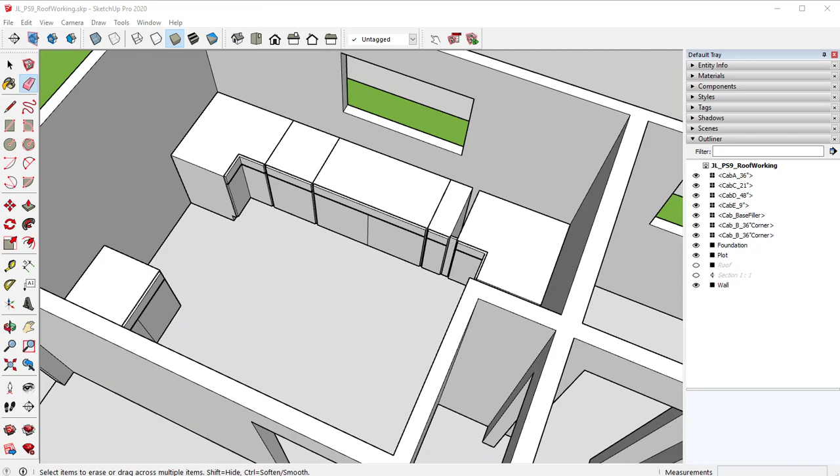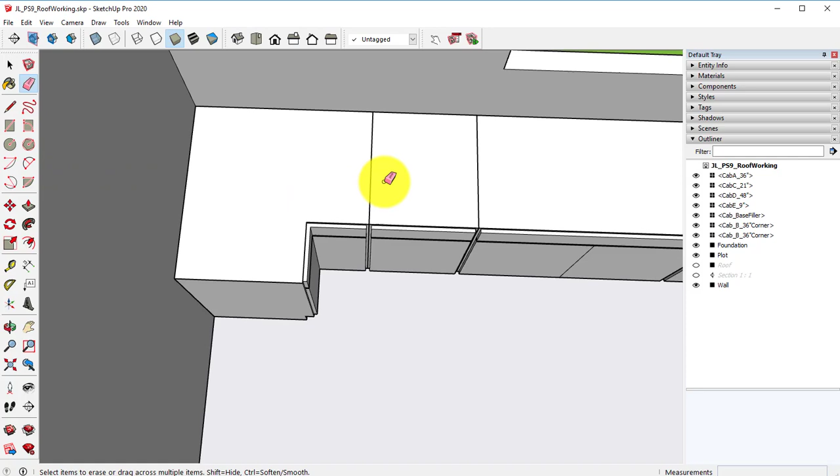So if we come over here to the right, this is going to be flush. So let's create our rectangles. Going to erase my line, so now I have one single piece. Take my push-pull tool, and we're going to pull this up 1.5 inches.

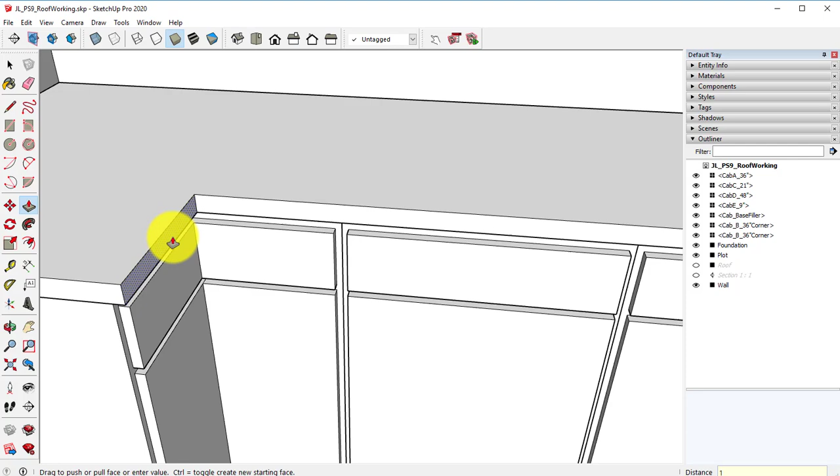We do have a slight overhang of 1 inch, so I'm going to take each one of these sections and pull it out 1 inch. And we'll go to this other side over here and do the same thing. We do not want to do it for this piece or this piece over here, as that's where the stove and the refrigerator is going to go.

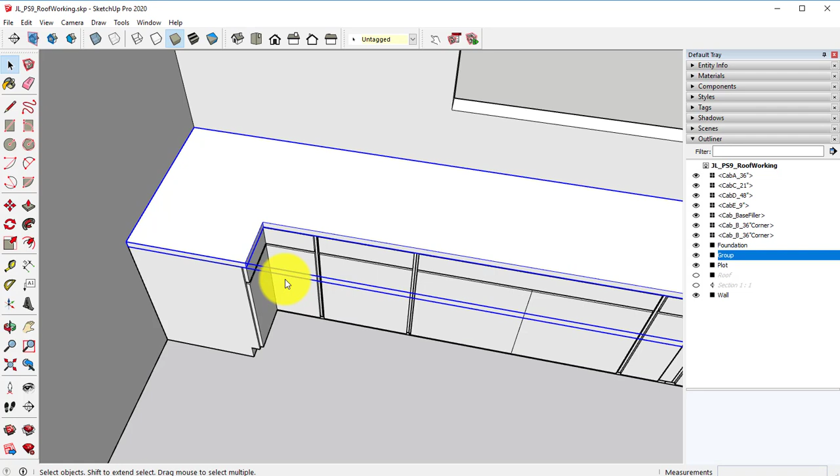Take our selection tool. We're going to triple click on this, right click. I'm going to go ahead and make it a component or a group. Either one is fine. And we're going to name it K counter A, because we will have a few different countertops.

We'll have this countertop, we're going to have the countertop over here, and then we'll have a countertop over in the bathroom. While I'm also over here, in your outliner panel, click on the very top one, hold down shift, and click on the last cabinet, right click on it, and make that a group.

And I'm going to name this kitchen base cabinets.

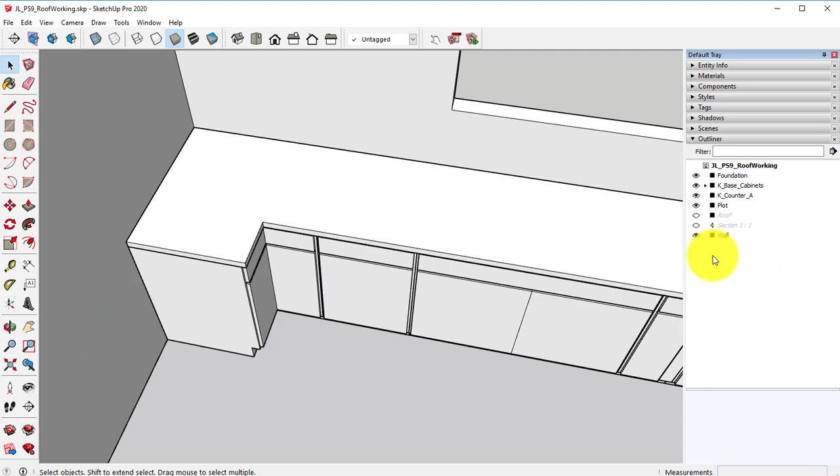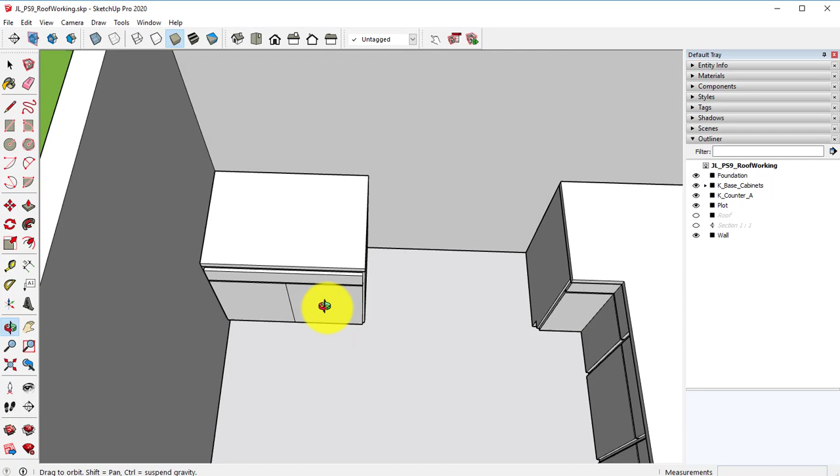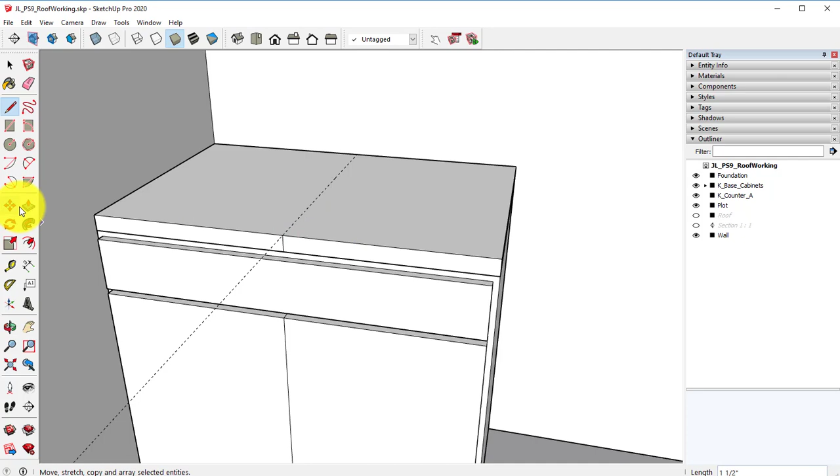Over here, we're going to have another countertop, the size of this one. I'm going to go ahead and pull this one up 1.5 inches. I'm then going to take my tape measure, and I want to measure out 18 inches. Hit the L key or the line tool. Let's draw a line straight down, make sure it's blue. We're then going to take our push-pull tool, and we're going to pull this part out 4 foot 6 inches.

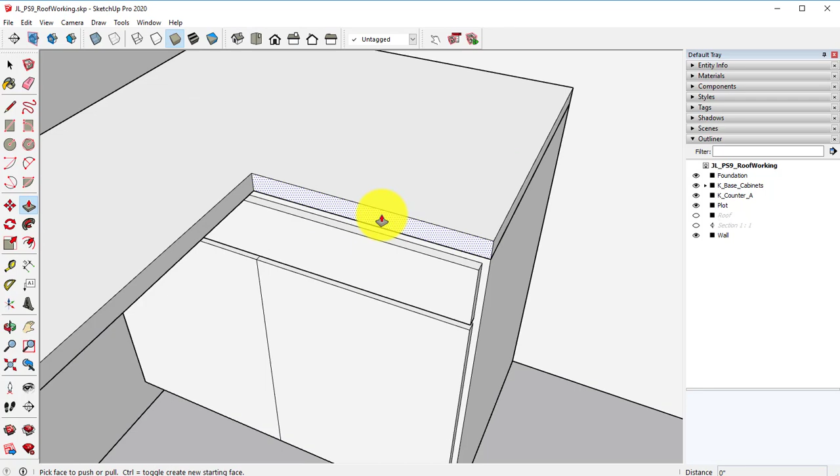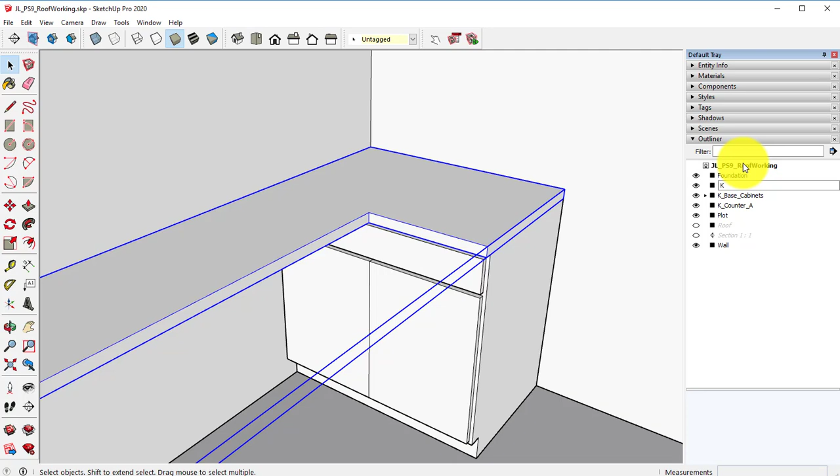Take your push-pull tool again. We're going to pull this right side out 1 inch to create our 1 inch overhang. Take your selection tool, triple click on it, make sure that everything is selected, right click, make it a group. Come over here to the Outliner panel, double click on that group, and we're going to name this one kitchen counter B.

If you ever get lost, like in the walls and all that stuff, over here in your tool panel, you can click on zoom extents, and that will zoom out.

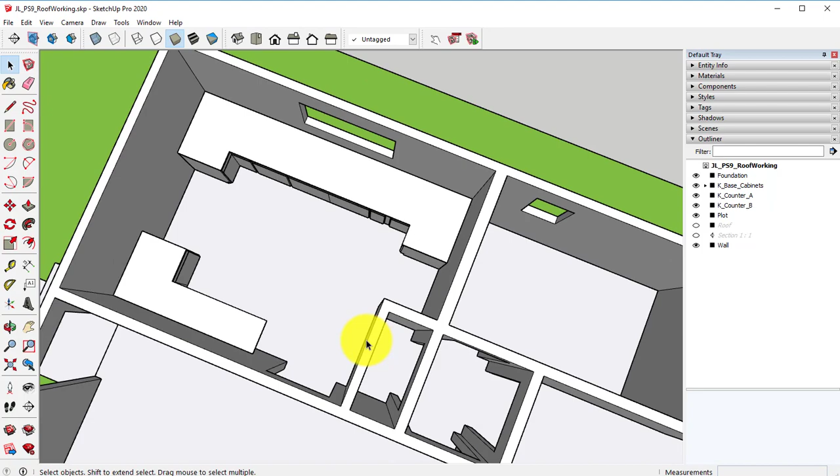So now we have our kitchen base counters. We'll add in our little legs here later on. We're going to start working on our upper cabinets now, and again, just like previously, I'm going to work on the corners, and then we'll go from there.

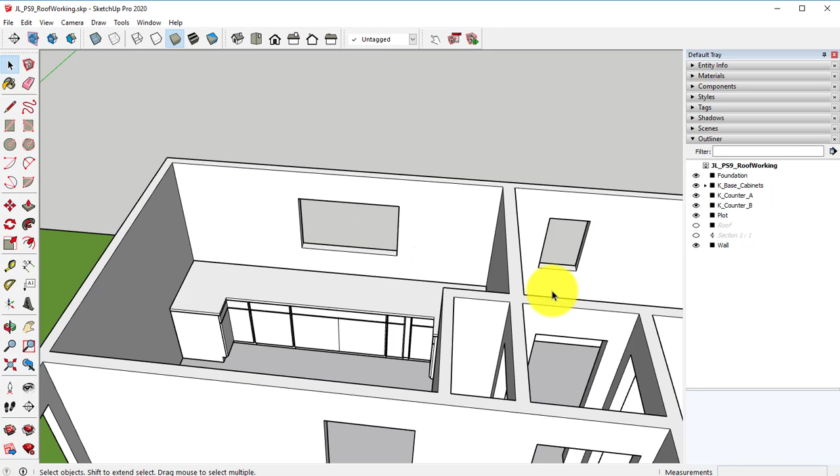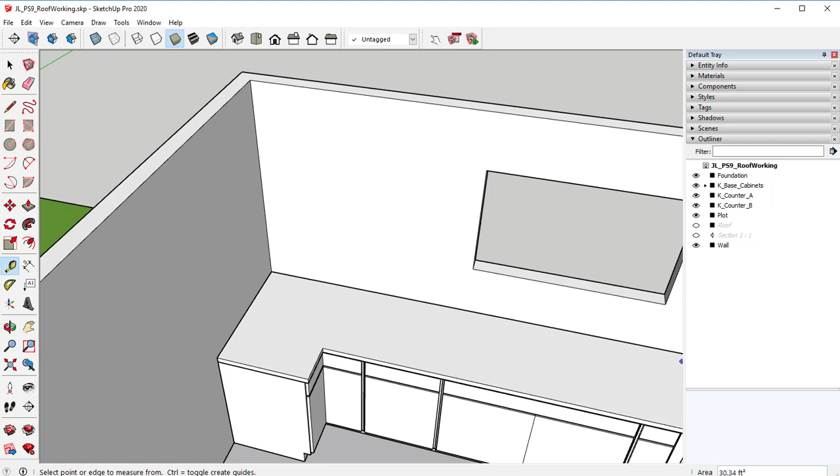So to create our measurements, we're going to go up 18 inches. And then for the most part, our cabinets are going to be 36 inches tall.

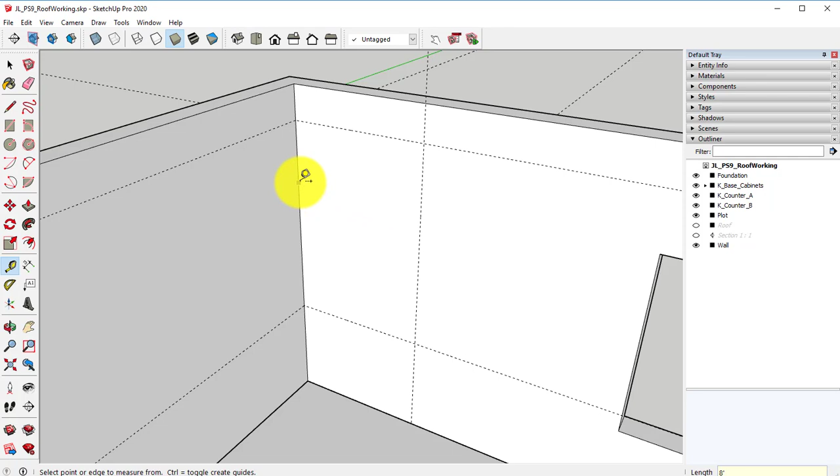So let's create our cabinets over here. You can type in the measurements, or you can use the right side over here as a reference, whichever you prefer. Take our tape measure, go from the corner. We're going to go to the right 24 inches. We'll go out this way 24 inches as well. Let's take our rectangle tool, draw in our rectangles.

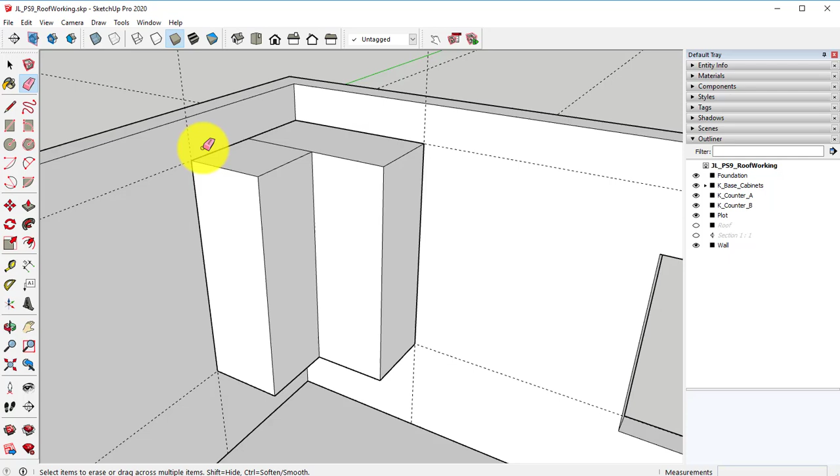Take our push-pull tool and pull these out 12 inches. Click on the eraser tool, clean up our lines. We're then going to use very similar measurements as what our base cabinets are, so 1/2 inch.

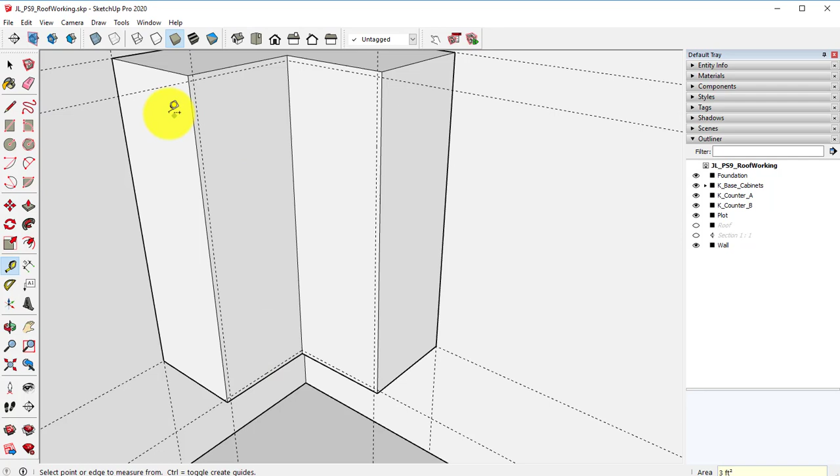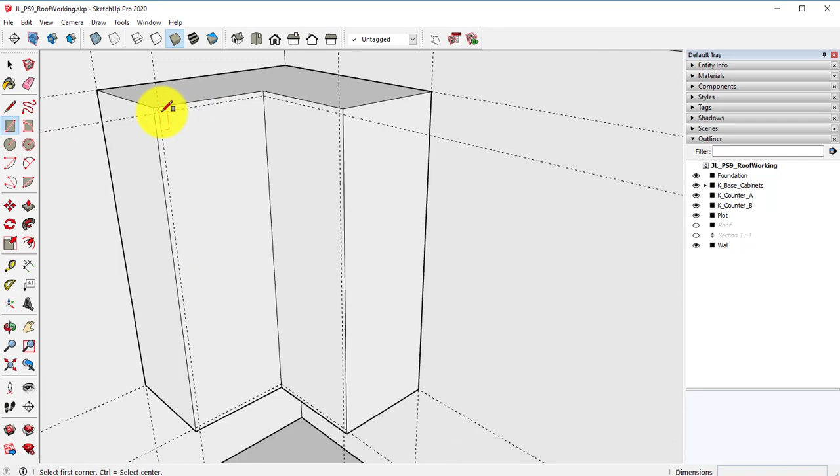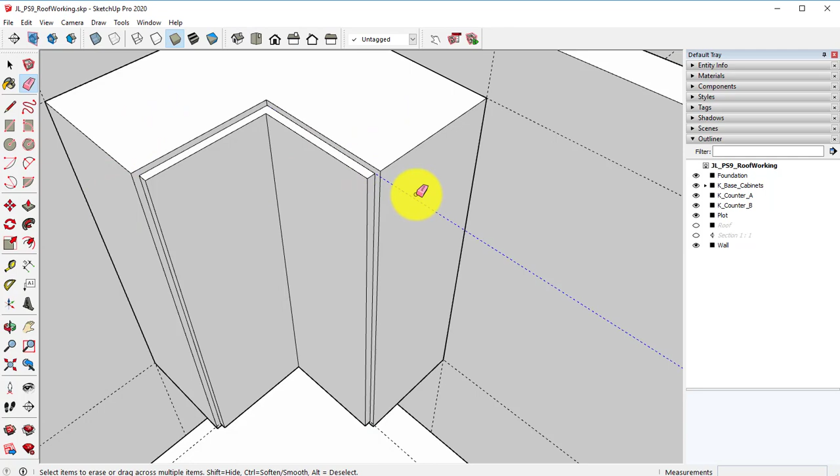I'm also going to leave that one piece, and pull this out 0.75 or 3/4 of an inch. I'm also going to clean up our lines. There we go.

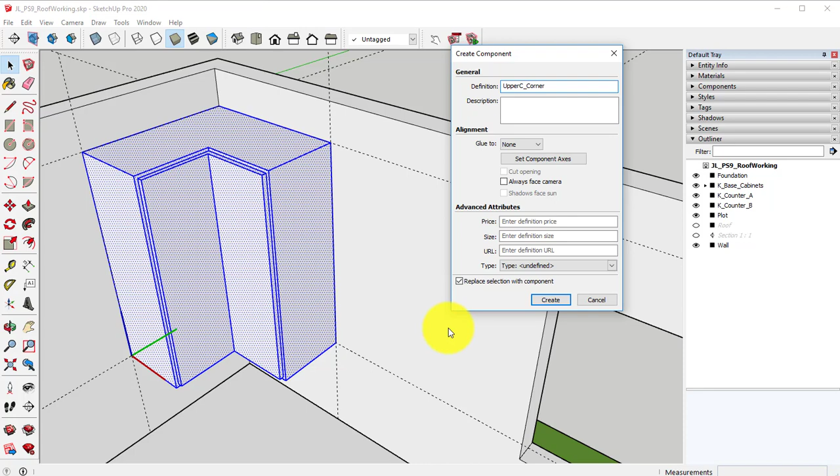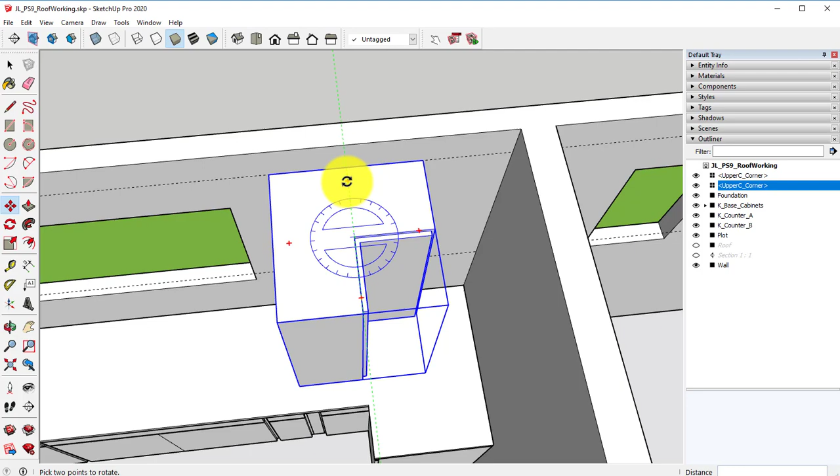Let's triple click on our cabinet, make group, or make a component. We're going to do upper cabinet corner, again, there's 2 of them, so we're going to go to the opposite side as well. Click on the corner, hit Control, we're going to move this along the red axis. Click, hover over the red X, rotate this around, hover over that 3 o'clock mark, go ahead and click, and pull it into the other corner.

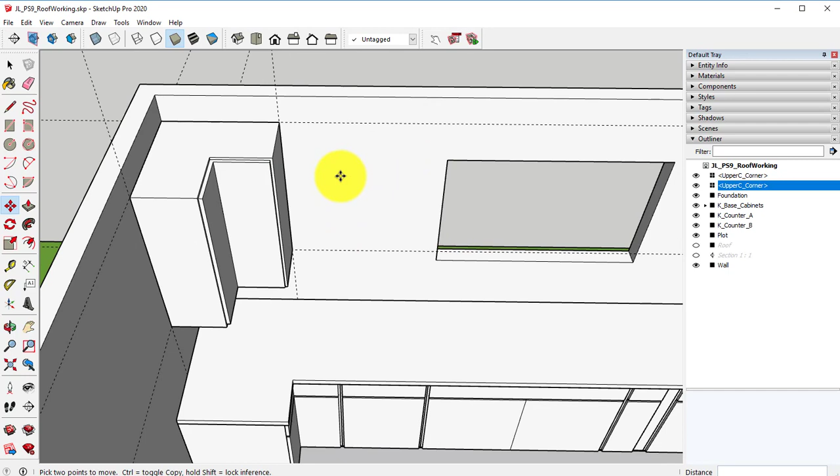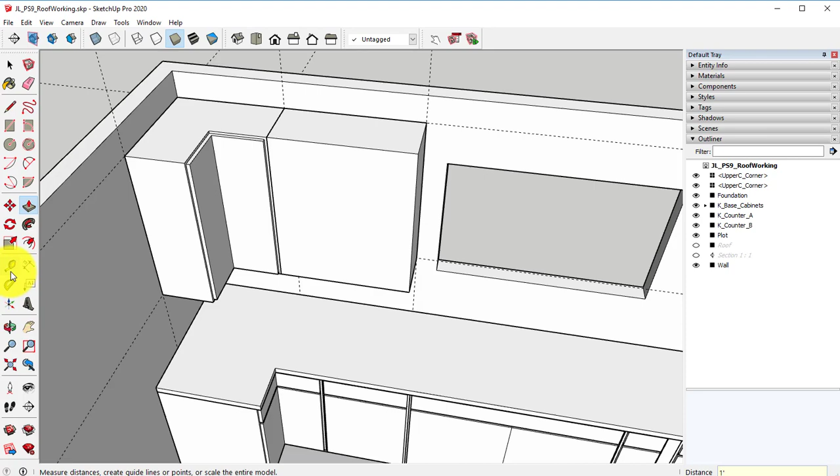Our next one over here is going to be a 30-inch cabinet. So let's go from here over 30 inches. Pull this out 12 inches. And we'll create our 1/2 inch all the way around.

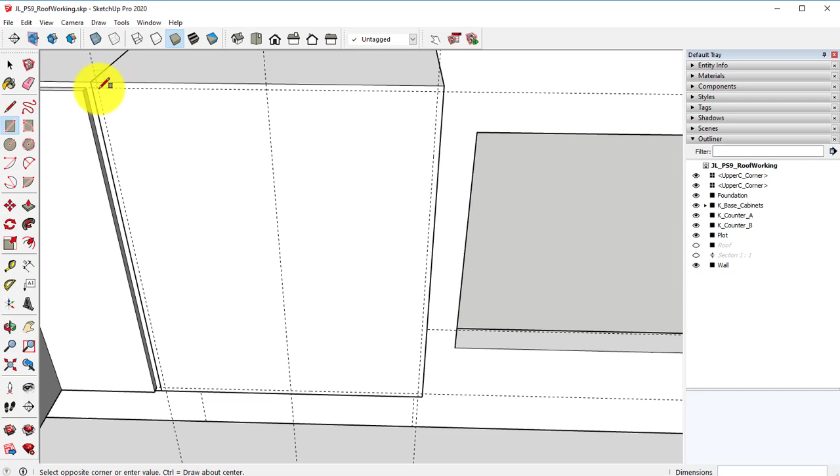We will split this into 2 different doors. Find that midpoint, and let's draw in our 2 doors. Select the P key for the push-pull tool, and we'll do 1/2 inch. Let's erase our lines.

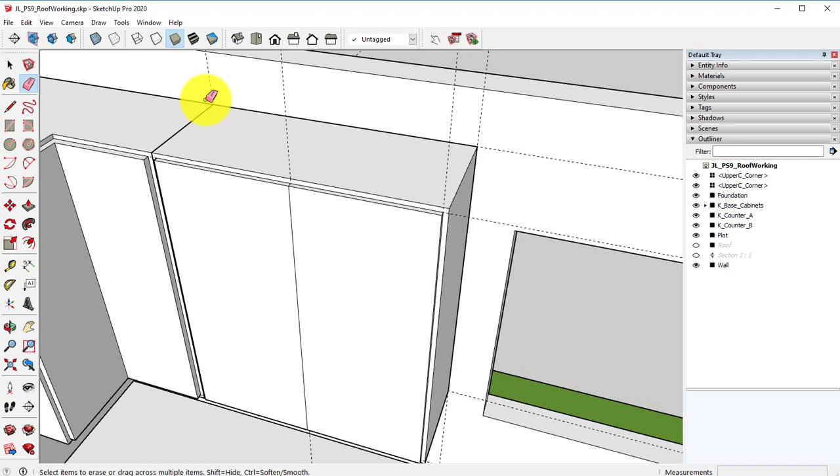And turn this into a component. Upper cabinet. This is going to be our 30-inch.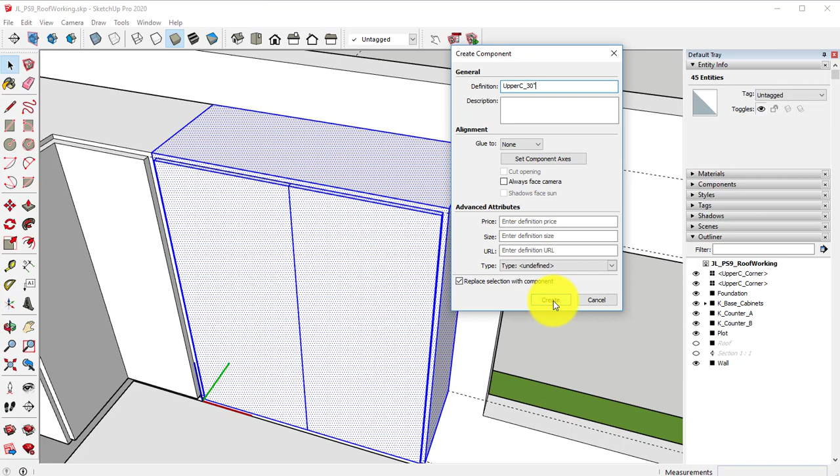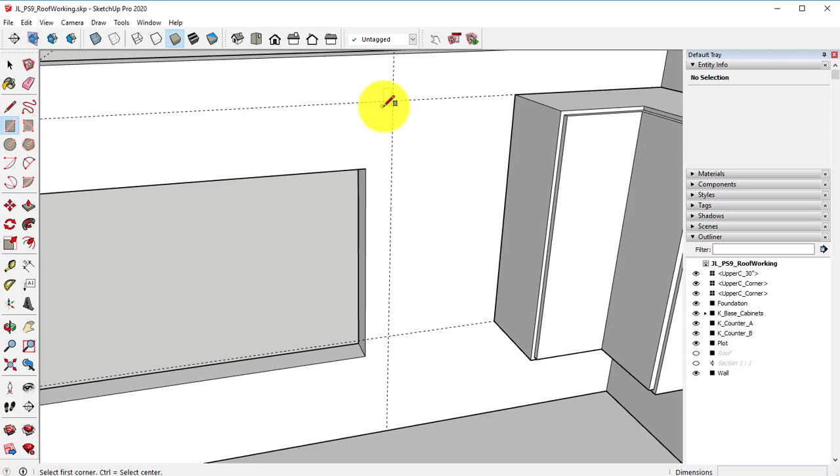Over here on the other side, our cabinet is going to be 18 inches. So we're going to take our tape measure, create our 18-inch mark, create our rectangle, same exact fashion that we have been doing, pulling this out 12 inches, and creating our door. In this case, it's going to be just one door.

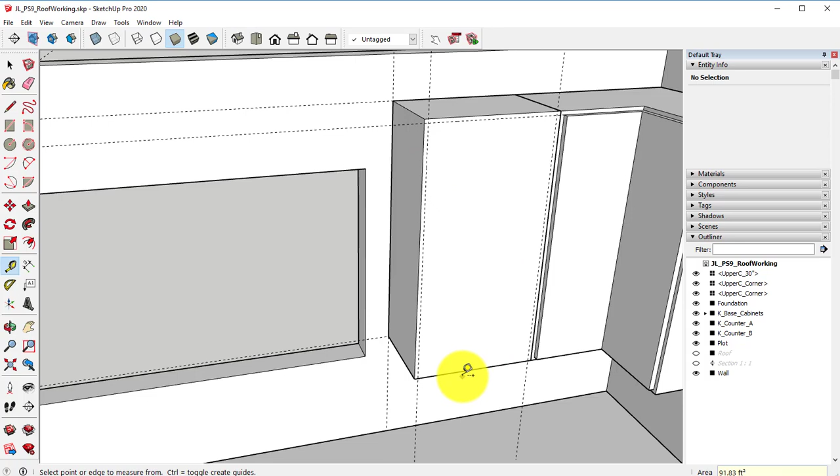The biggest thing is making sure that your tape measure lines are one of the axis colors, so red, green, or blue. That tends to help make sure that all your lines are correct, or they're going where you expect them to go.

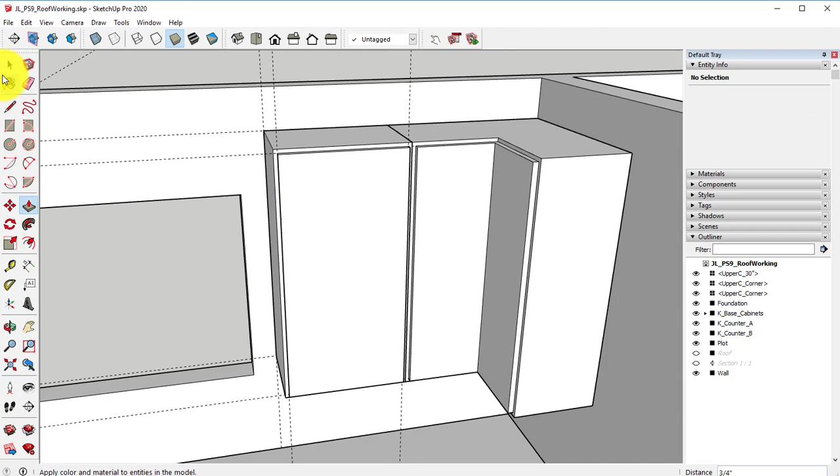Right click, make it a group, or make it a component. Try to keep it similar naming conventions. This one was 18 inches.

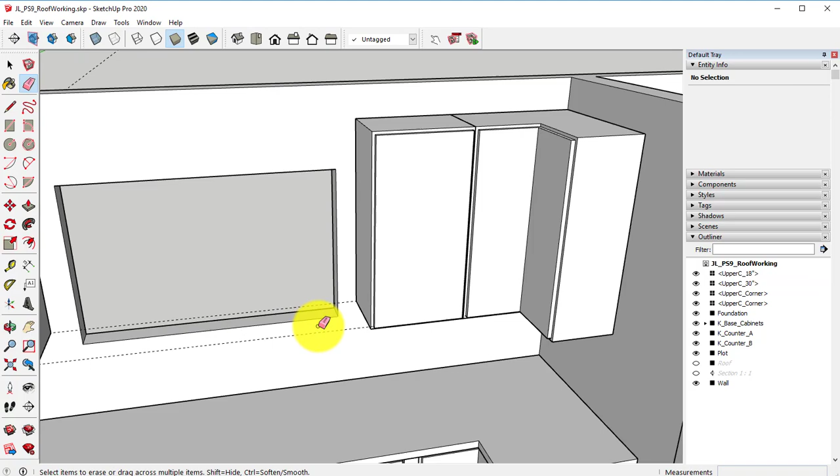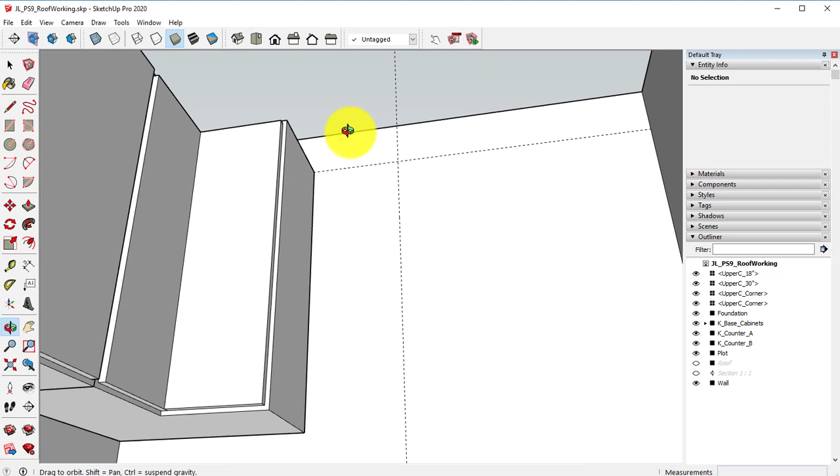Over here to the right, we do have a small cabinet, going to be a 12-inch cabinet. I'll double click right here to create a guide, and double click again to create another guide, then let's go ahead and draw in our 12-inch cabinet. That should line up down here at the very bottom, as again, right here is going to be our refrigerator.

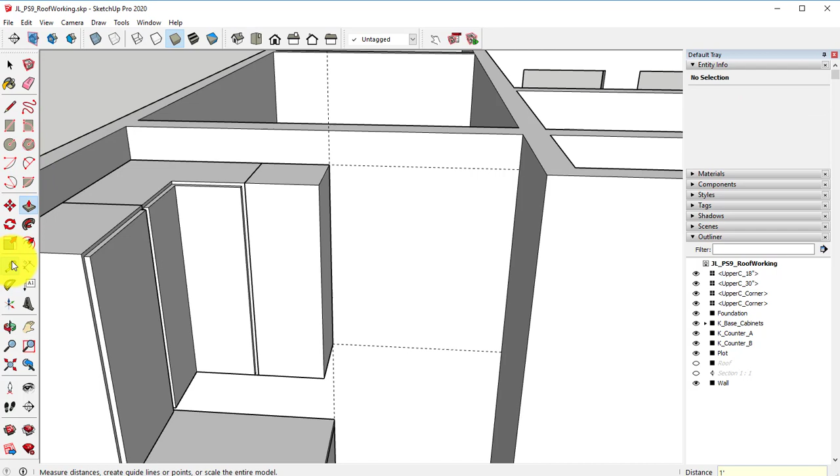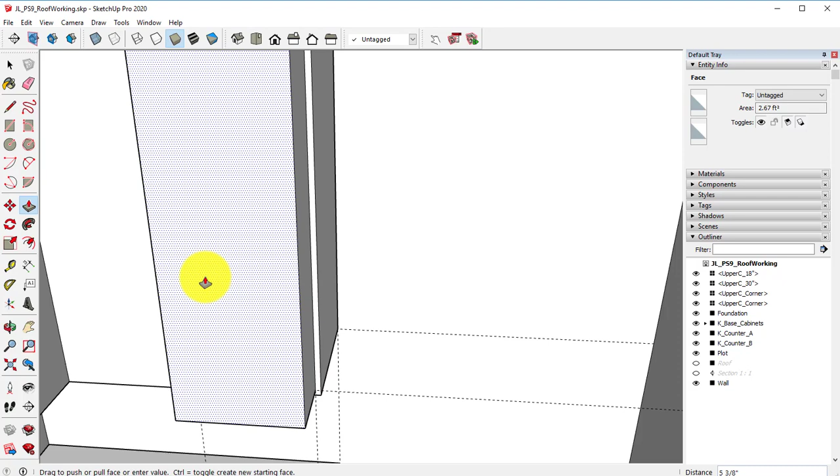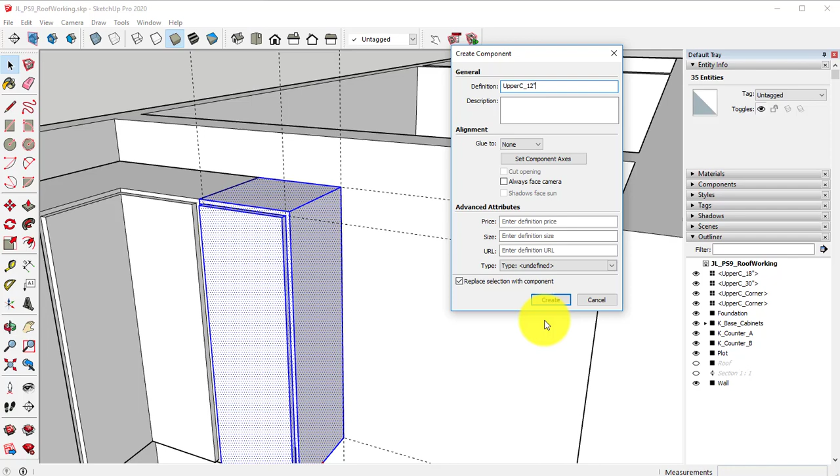Let's pull this out 12 inches, and let's create a door the same exact way we have been. All of our spaces are 1/2 inch, with the door itself being 3/4 of an inch thick. Take our selection tool, which is the space bar, triple click on it real quick, right click, make it a component. Looking over in our Outliner panel, we're just going to continue with our naming conventions to make sure everything is organized and nicely named.

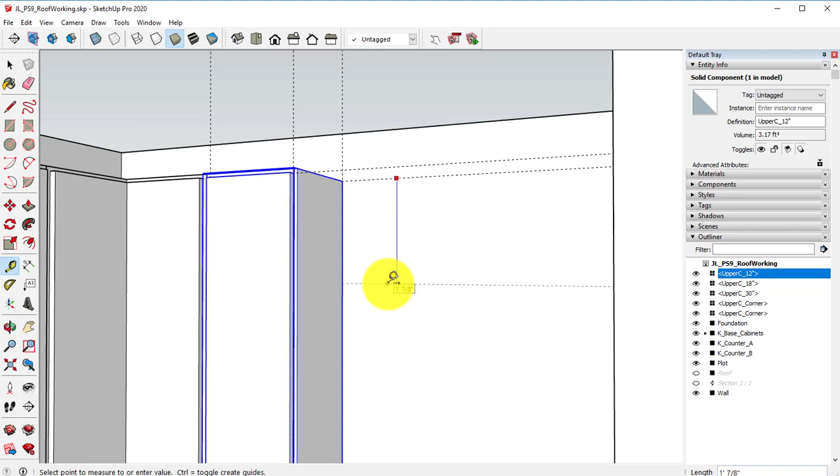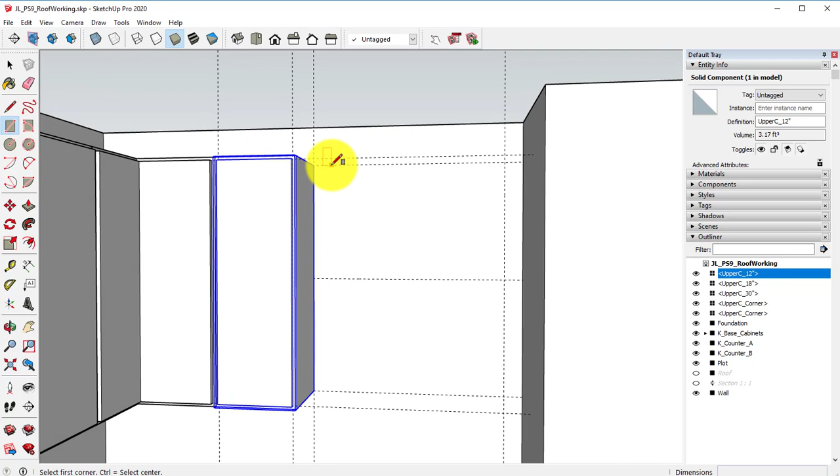Our last cabinet on this side is going to be a little different. We're going to go from our top here and go down 18 inches, create a width of 30 inches. Let's create our box, pull this out 12 inches, and do our doorway just like we have been, except we'll actually split this again into 2 different doors.

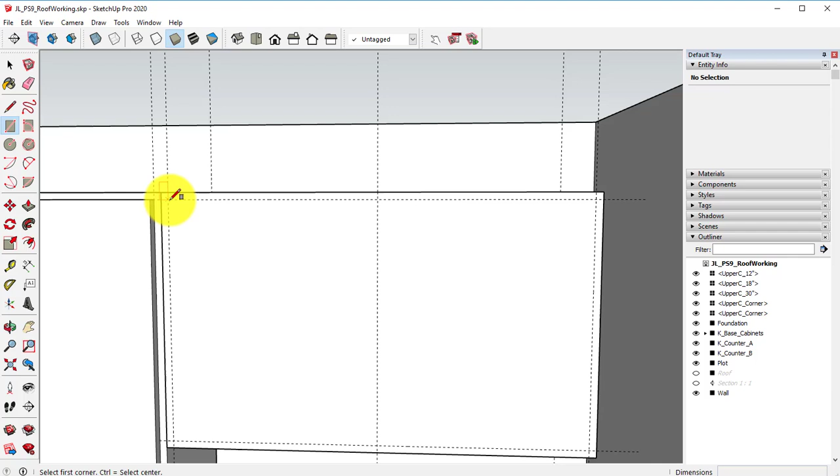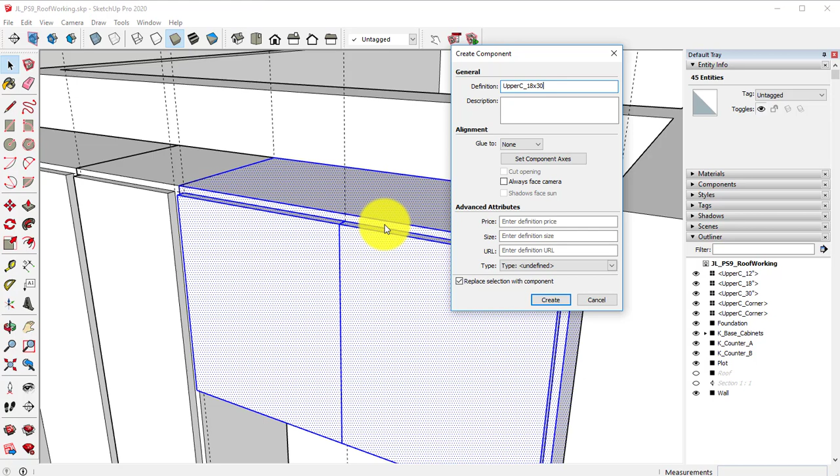Right click, make it a component. This one again is our 30 inch, or 18 by 30, just so we don't confuse it with the other 30-inch cabinet.

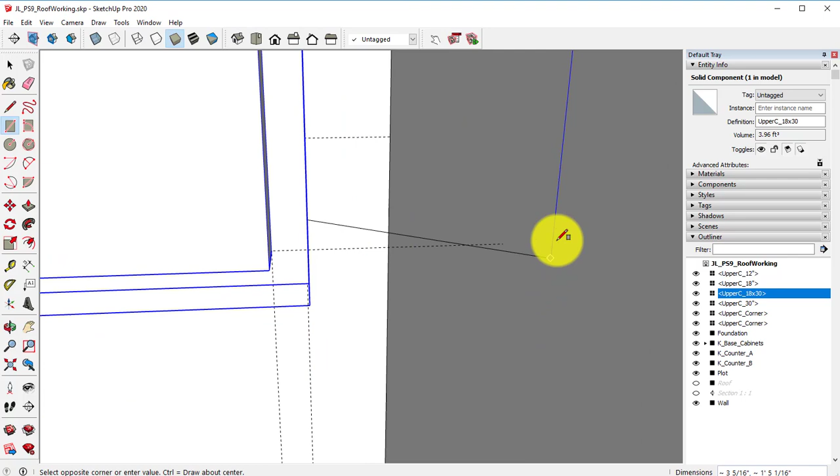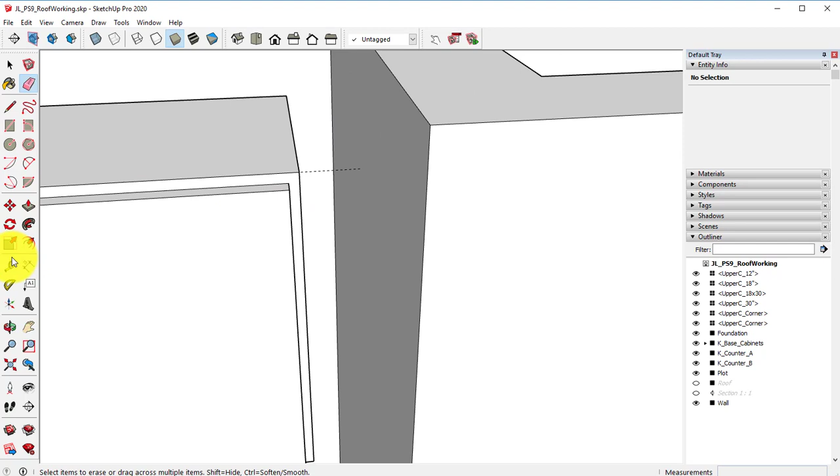I do want to go ahead and create our filler space for this over here. So take our rectangle tool. I'm going to zoom in to that upper corner, make sure I'm clicking on the right one. All right, let's try this a different way - I'm going to make a guide, so let's erase all these other guides. I'm going to create a guide along the top here, and from this, go down and create a guide down here. Now I have my corners, so I'm going to create my rectangle.

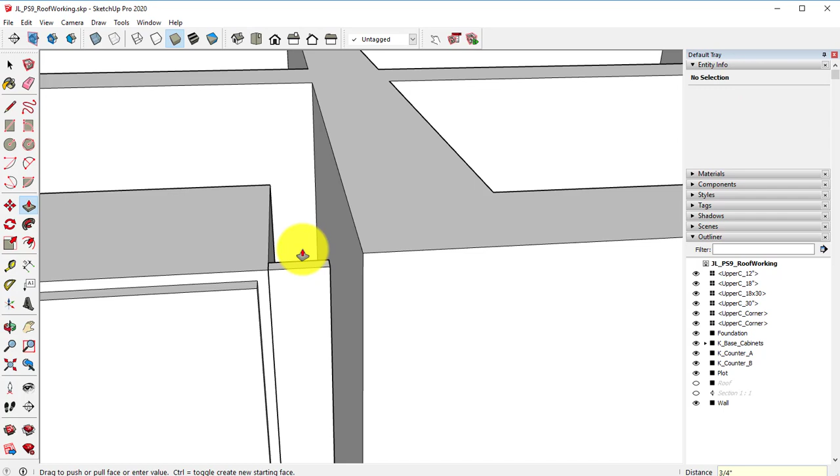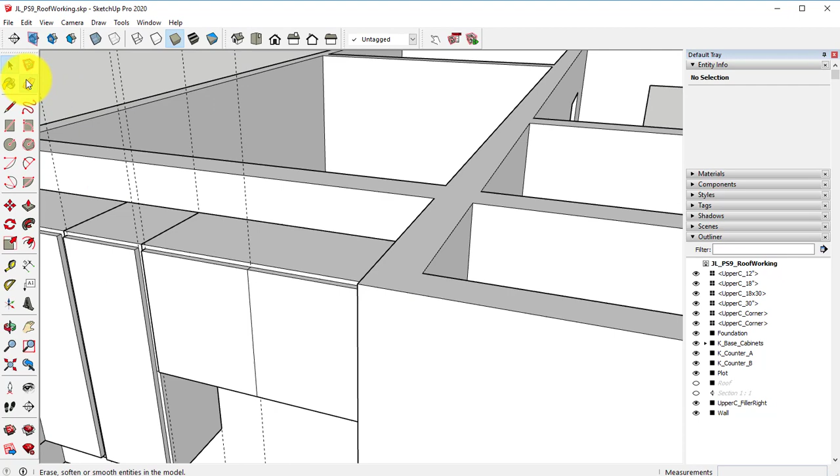Take my push-pull tool and pull this back 0.75. Right-click, make this a group. Double-click on it over here and name it upper cabinet filler right, just in case we need something on the other side. Since we're done on this side over here, we can come in and delete all of our guides.

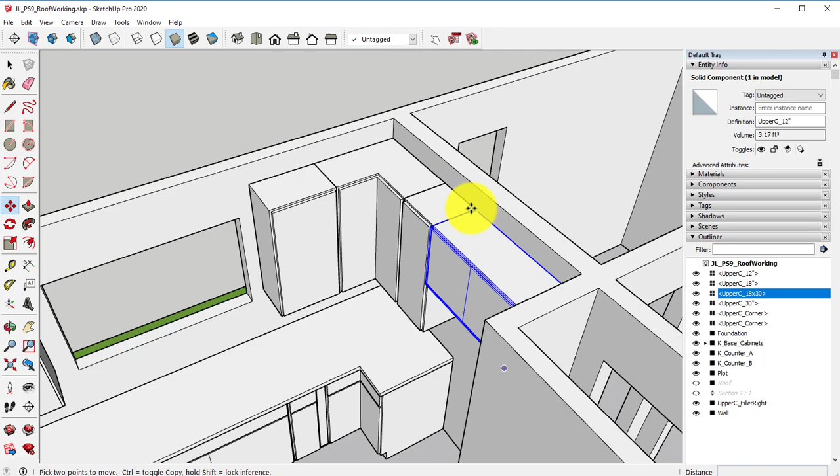Over here on the right, we are reusing this cabinet right here. So let's go ahead and take this cabinet, hit Control, bring it all the way over here to the right, go along the red axis. We're going to rotate this around 180 degrees, drag it by this corner, and we're going to place it at that corner.

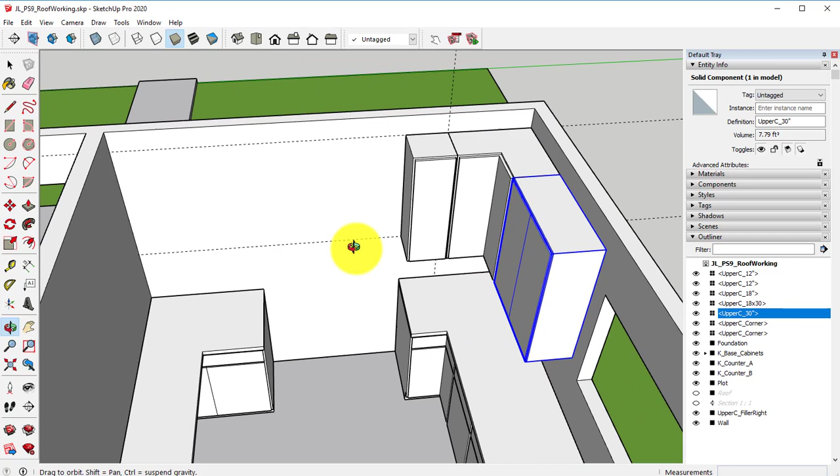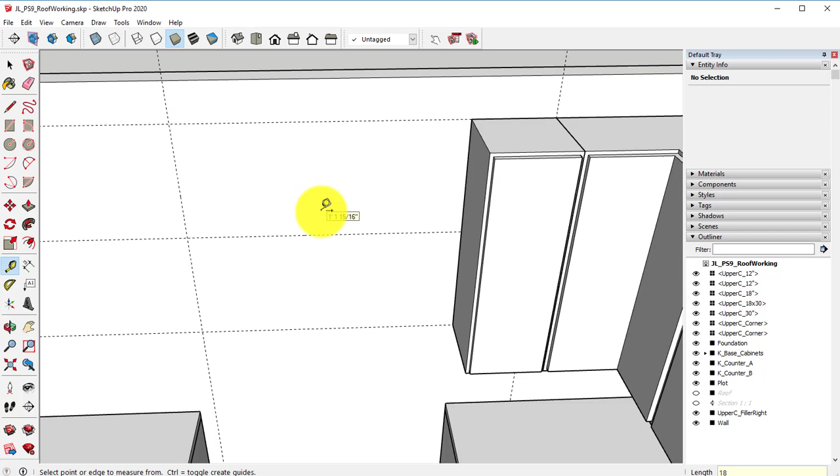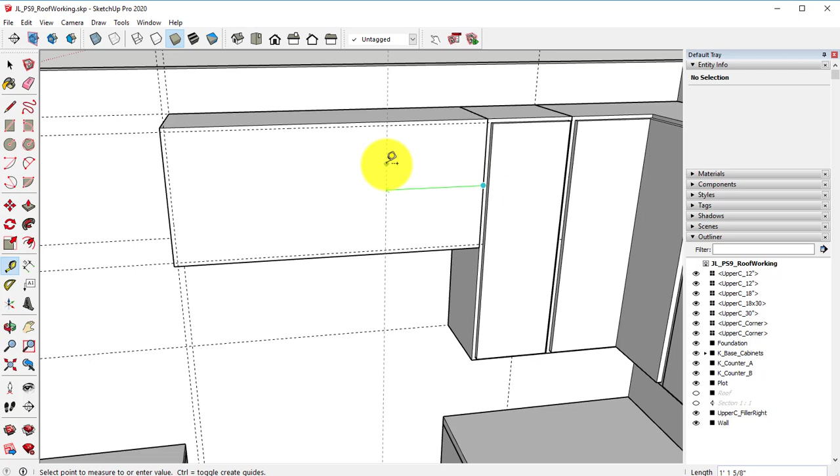This next one is going to be a 42-inch cabinet, and it's going to be 18 inches tall. Let's come in here and create our rectangle, pull this out to a foot, create our border like we have been doing, and draw in our doorways.

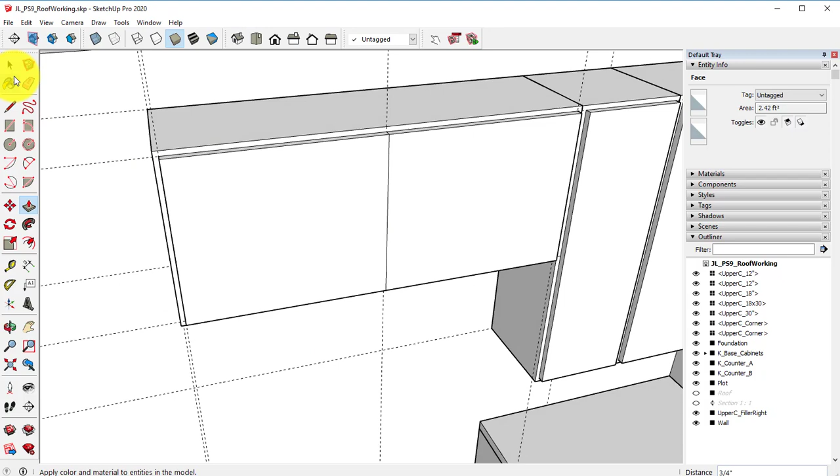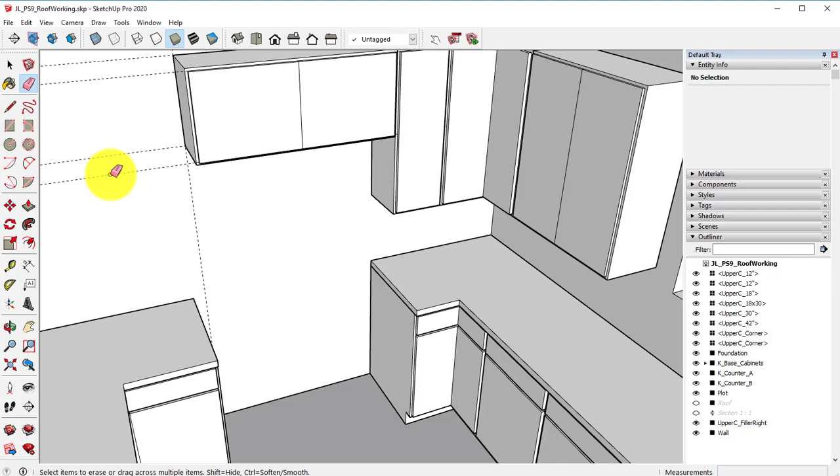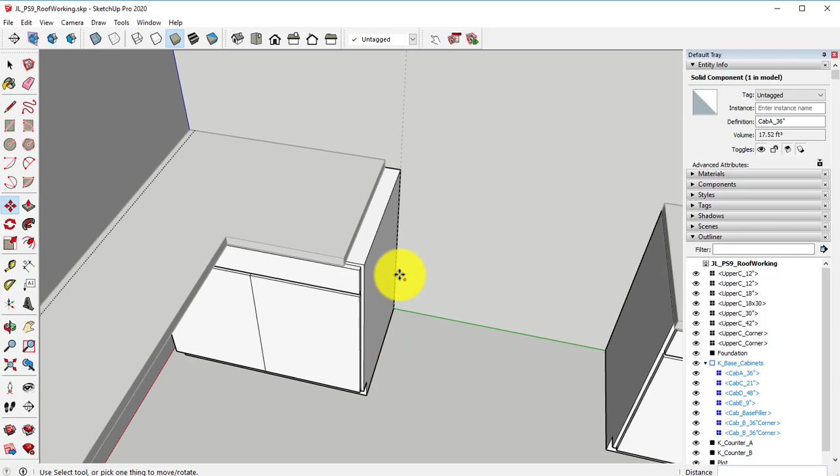Right-click, make this a component. Upper cabinet, 42-inch. I do want to make one change while I'm at this point. We have this guide here - this is where our base cabinet should end. So for here, I need to right click, edit this group. I'm going to take my move tool and move this to the right and place it here. Make sure you're moving that one and not your other base cabinets. Right click, close group. I want to edit that countertop and let's pull this out to there.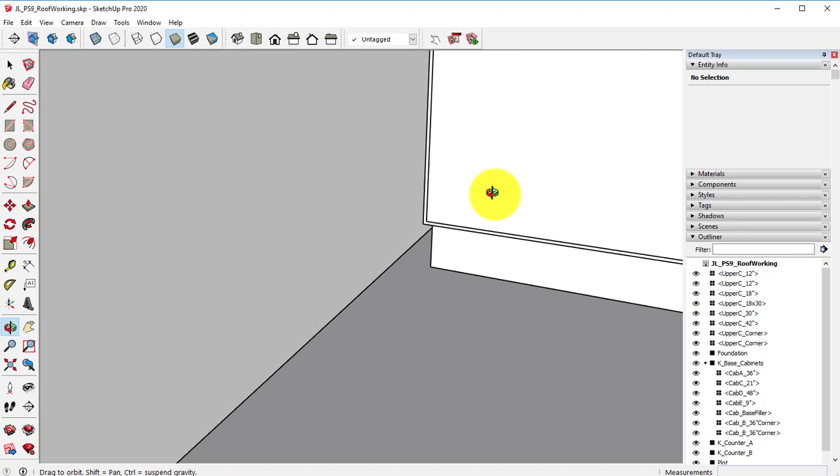We do have a small little space right here that we will fill up a little bit later on. This last counter, really quick, is going to be our number 1 cabinet. It is going to be 12 inches deep, 36 inches wide, and 36 inches tall. So we can erase that mark, go down 36 inches, go from here over 36 inches, and we'll have that little filler space again.

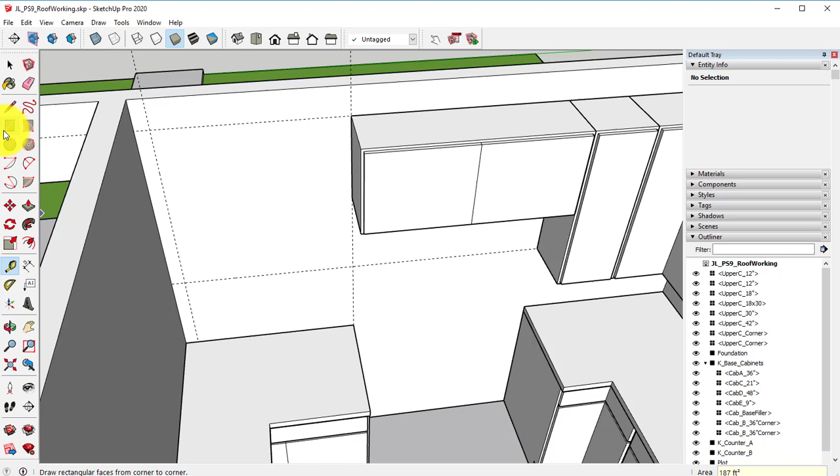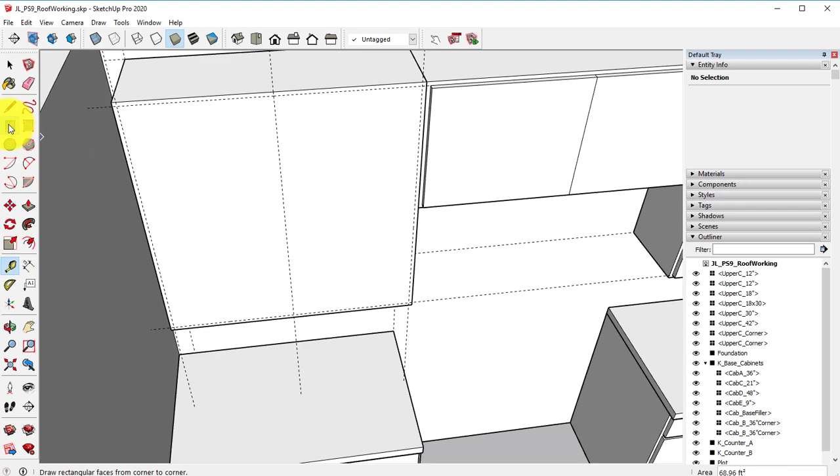So finishing up this will finish up this particular project, or this particular episode. We will clean this up in our next episode, put in the filler spaces and clean up the outliner panel there from these upper cabinets. So we'll do all of that in our next episode of this series.

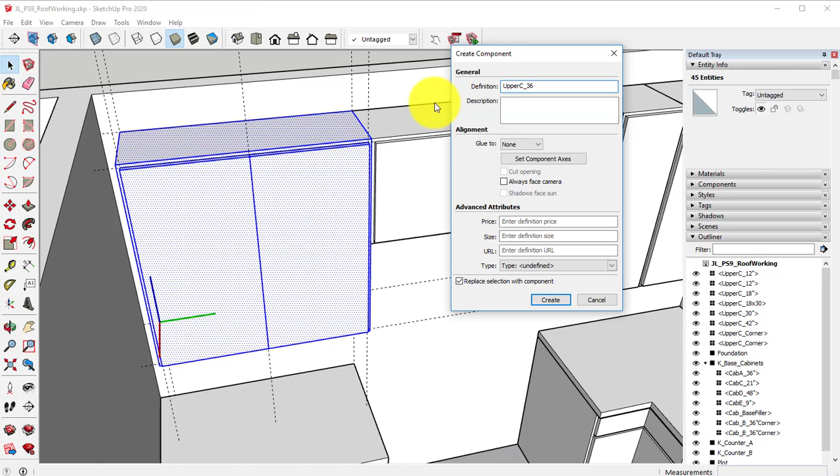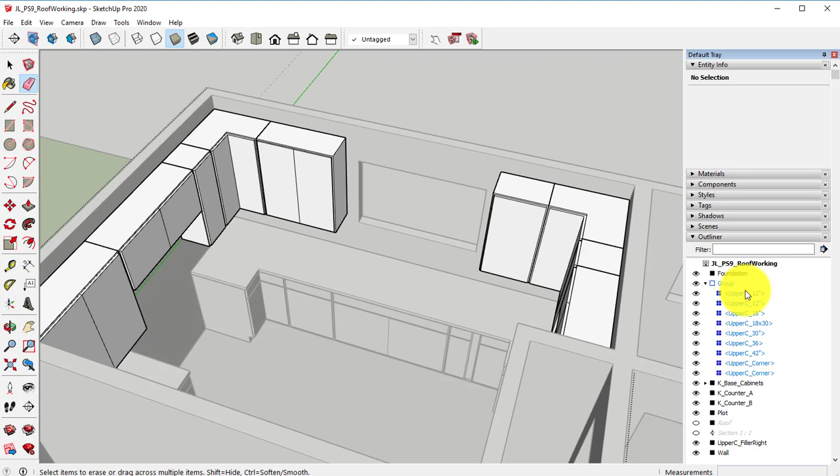So let's turn this into a component one last time - upper cabinet, 36 inch. So clean this up, delete our guides, come in here and toggle down our base cabinets, select all of our upper cabinets, right click, make that a group, and we're going to name this upper cabinets.